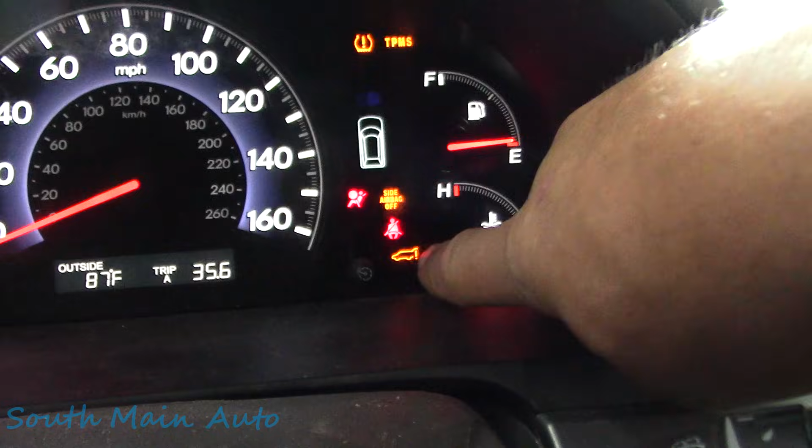Let's see. Oh yeah, it was this symbol down here - a little tailgate up, exclamation point. He left the box of goodies here, so it looks like these are the original parts. That's the control module, and this is the latch here.

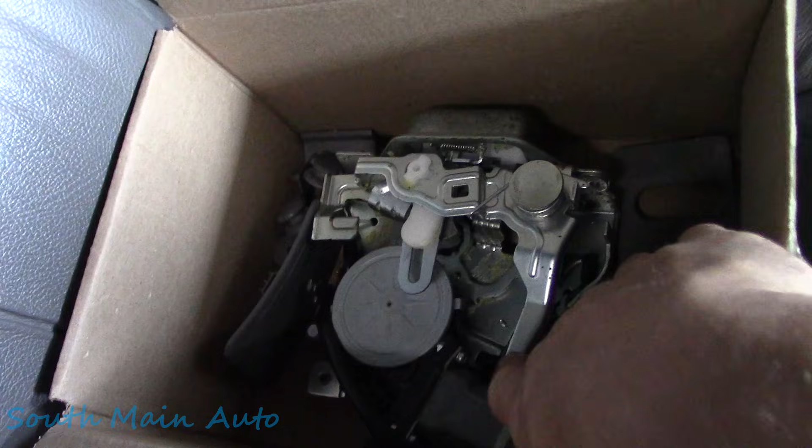So I think first and foremost, I'll go back there - he's got the little panel off it back there. We can take and pop the thing open, just kind of a little visual inspection. Maybe we can even look at this.

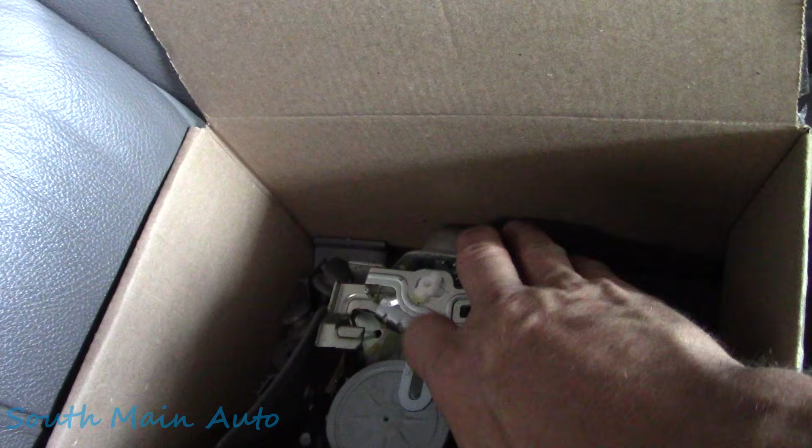And then we're going to have to look at some service data, see how this little guy works. Honda's pretty cool because they do have the little access panel here. I think I've shown this before on a Honda Pilot, perhaps - they had a latch that was bad or something. But you take the little cover off, and there is a little lever in there that you flip, and you can at least get your gate open manually.

But I notice that's all it does when we push the close button. I see that's kind of hanging out of there. The gate's looking a little rough, but still opens and closes mechanically just fine.

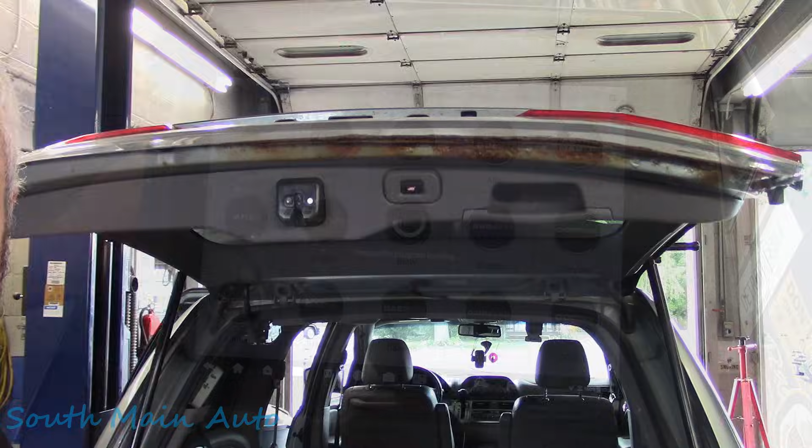I think before we dive too deep into the service data, being that it has its own control module, it appears, we'll look on scan data to see if there's anything here that pertains to the tailgate. Might give us some clues as we're looking at service data.

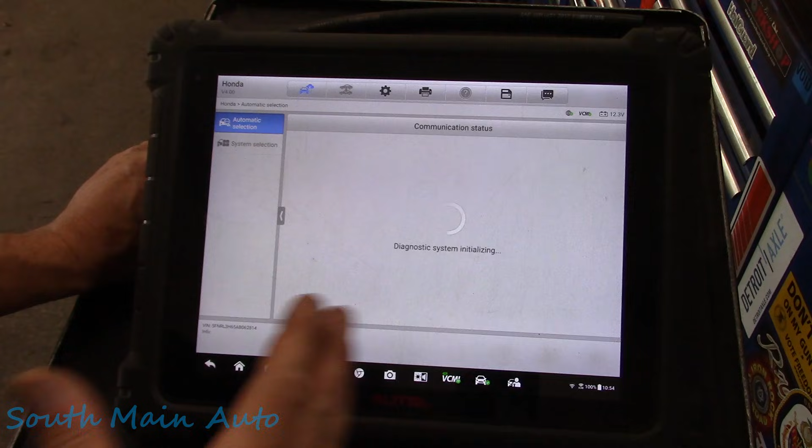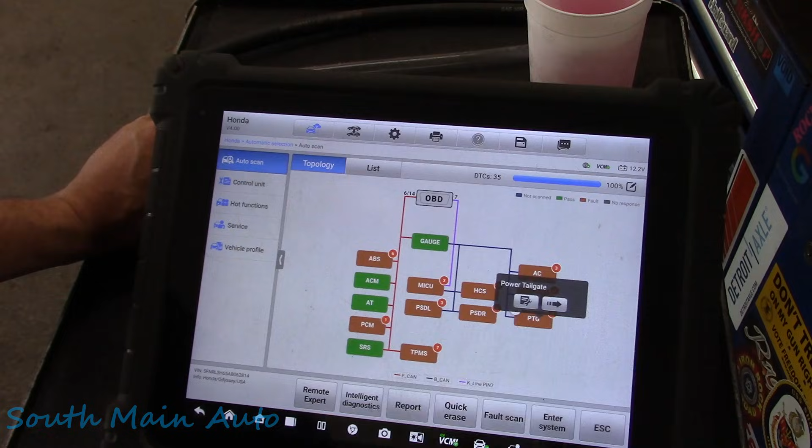So I'm going to let this scan first and see if we can talk to the tailgate module, or whatever Honda refers to it as. Okay, lots of codes. I'm assuming this is power tailgate, and it is power tailgate. So we're going to skip all the other codes for right now and just go to it.

Unless there's like communication type errors, then we'll go through and read everything out. So we'll pull the codes here: tailgate closer unit full latch switch circuit malfunction, power tailgate motor clutch circuit malfunction, and a short in rear mode control motor circuit.

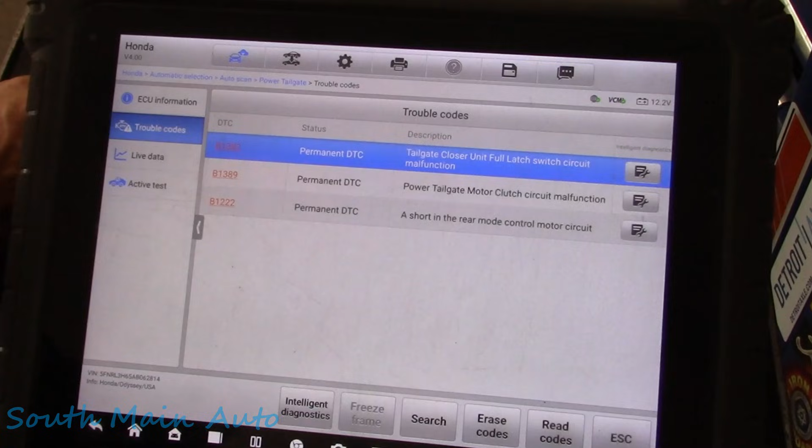So it's interesting, we have 3 permanent codes. And now I know he's been back here fiddling with stuff, so I don't know how many of these are relevant. So we're going to do this.

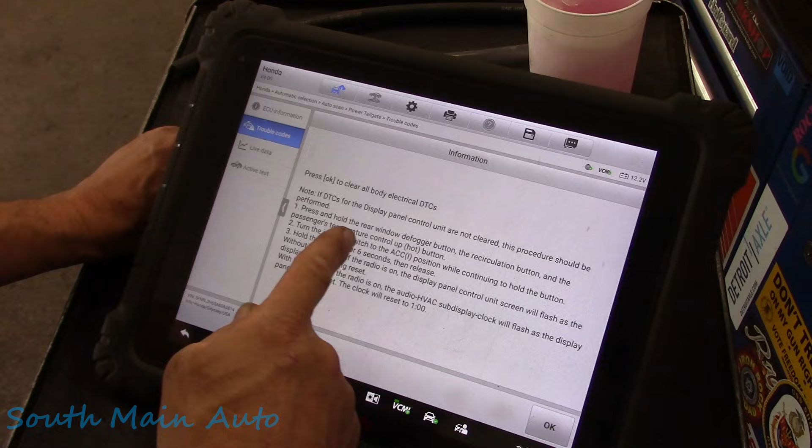It automatically saves them, so I'm just going to press OK to clear body codes. They're not cleared - oh okay, so if it doesn't clear, it tells us how to clear them. So we're going to see if they do clear out and see.

Okay, so it came back with just 2: short in rear mode control motor circuit and power tailgate motor clutch circuit malfunction. So I think this is probably where we'll start.

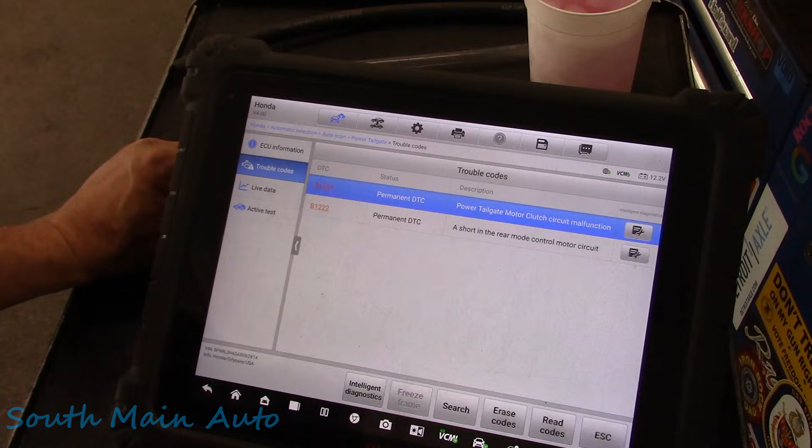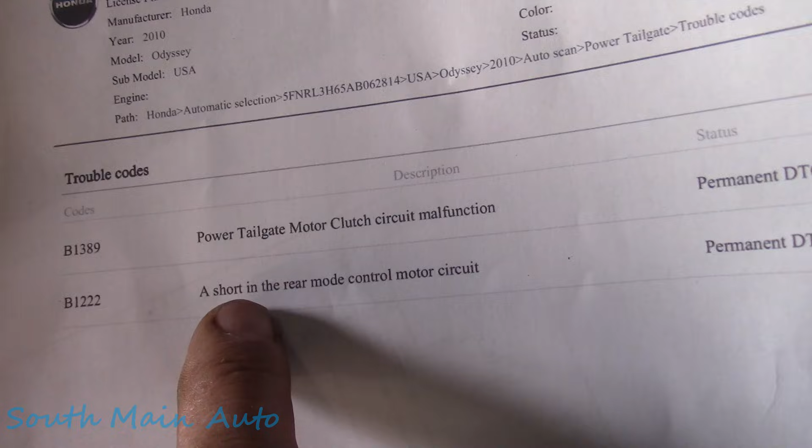We'll look on service data and see what we can learn. So this is kind of interesting - I was just looking on service data, I printed out the code so I didn't keep using the scan tool. This short in rear mode control motor circuit sounds funny because it has to deal with the HVAC unit, the actual rear mode control motor for changing panel to vent to floor. Why it's showing up in the tailgate control module, well, I'll tell maybe, I don't know.

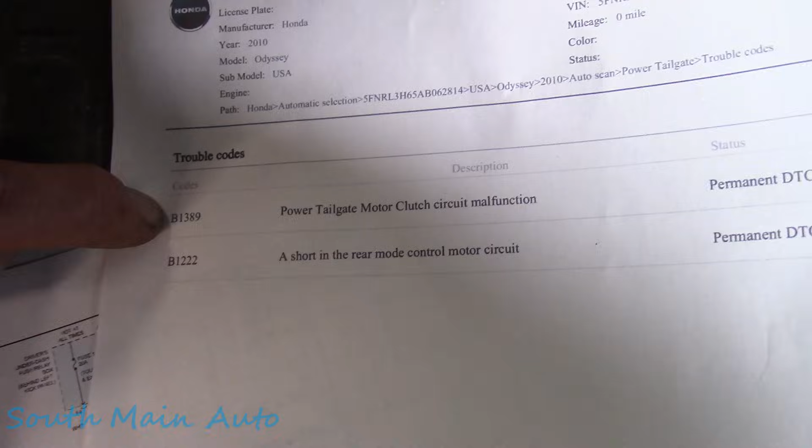This is the one we're actually after, this 1389 power tailgate motor clutch circuit malfunction. So I looked in service data so we could get a connector diagram and kind of see what it says about it, and then I printed us out an actual wiring diagram so we could see it.

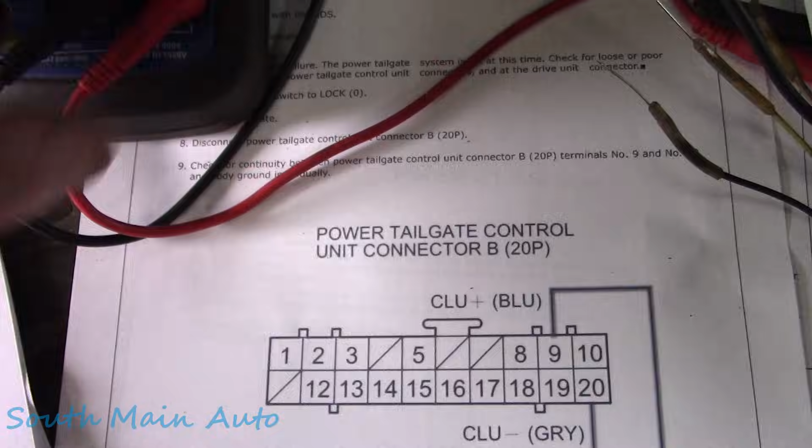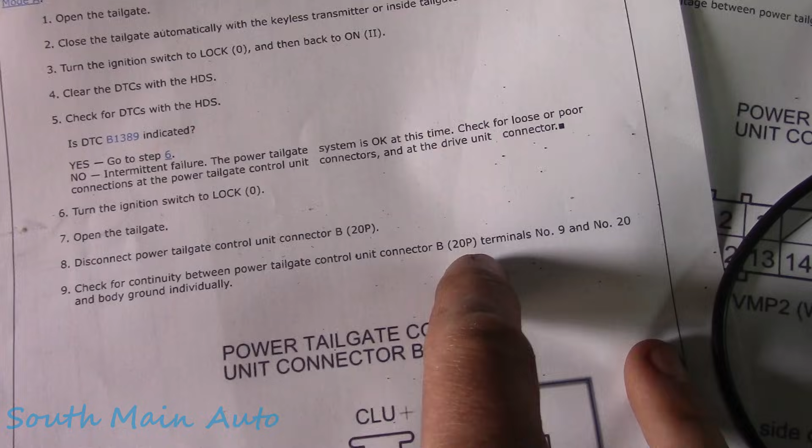So here's this power tailgate clutch, and I highlighted the two wires, and that goes along with service data. They're saying to make sure it's actually a hard fault code, and then check for continuity between tailgate control unit connector B, a 20 pin connector, terminal 9 and number 20, and body ground individually. They want to see if it's shorted.

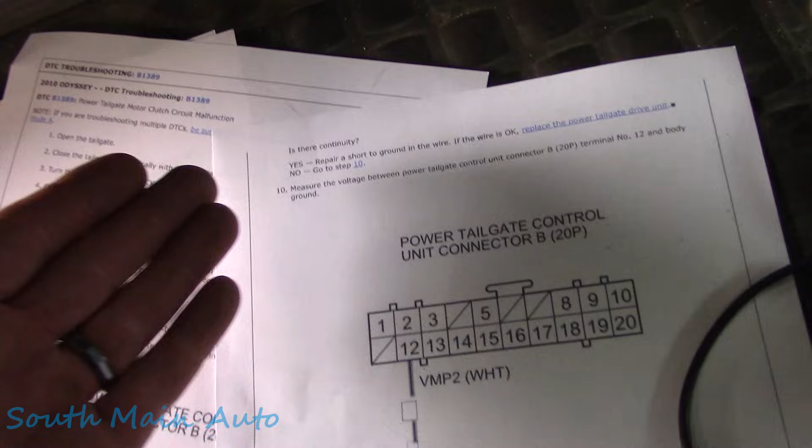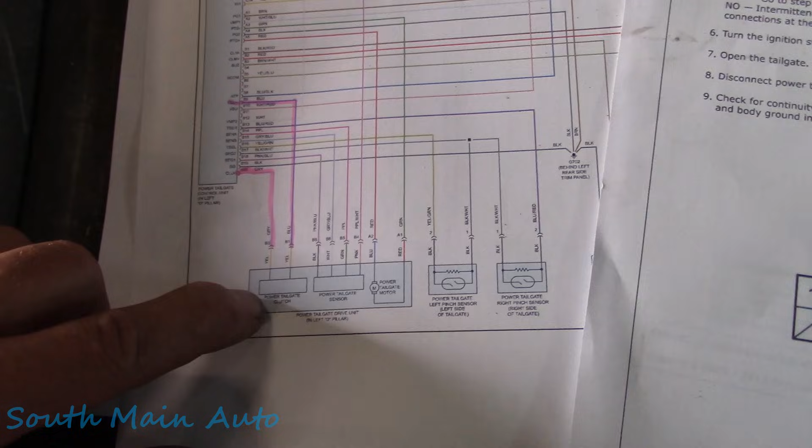Okay, so go along with that, as in short to ground, and then I think they have you do some other checks to see if it has power at the connector. But what we could do with this tailgate clutch, I assume it's some sort of solenoid, is check for short to ground, or check to see if it's continuous through there, and whether this clutch has, say, 10 ohms or something. They don't give us a spec, but is there continuity through the clutch? Does it have the ability to function?

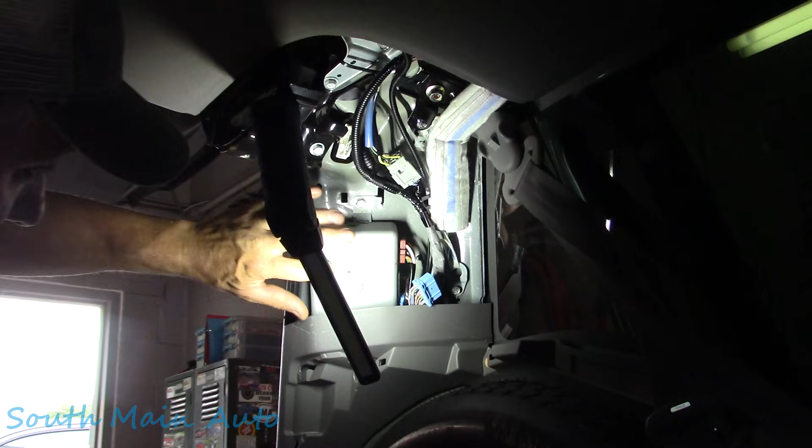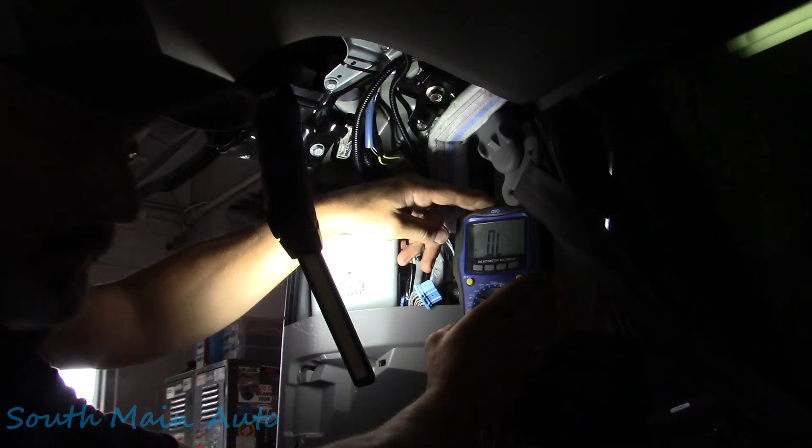Fortunately for us, this fella has this van torn apart. So here's the control module, here's connector B, and I see the gray wire and the blue wire, so pin 9 and pin 20, which go to the clutch. We'll get our meter up here. I don't know if you guys will be able to see it, but I'll give you a shout out as to what it is. I think the pins are big enough that we won't need anything special, so I'll hold that there. We'll just see if it has a short to ground.

Kind of doubt that it does, but nothing on that one, which is good. And then pin 20, or 9, lightly touch it there. Nothing there, but I want to see, more importantly, does it have continuity through it? And it does, about 7 ohms, 6.9.

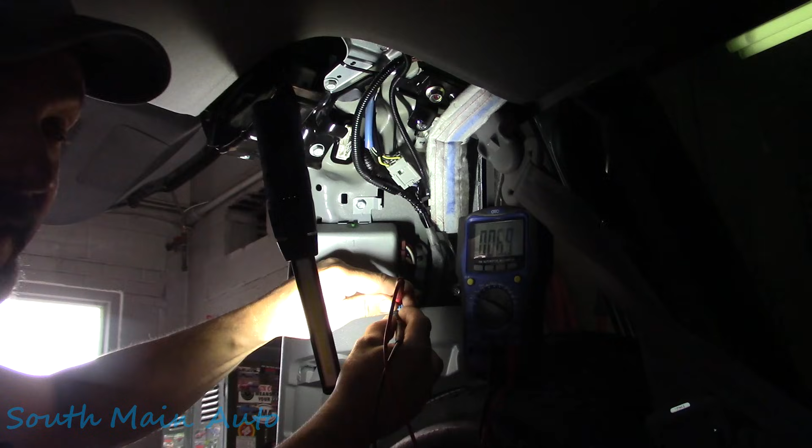Go figure, and that's kind of what I would expect on a solenoid, so that would draw an amp and a half, two amps, if that's how it functions. That's interesting. And I guess while we're right here at this connector, I think this said something about...

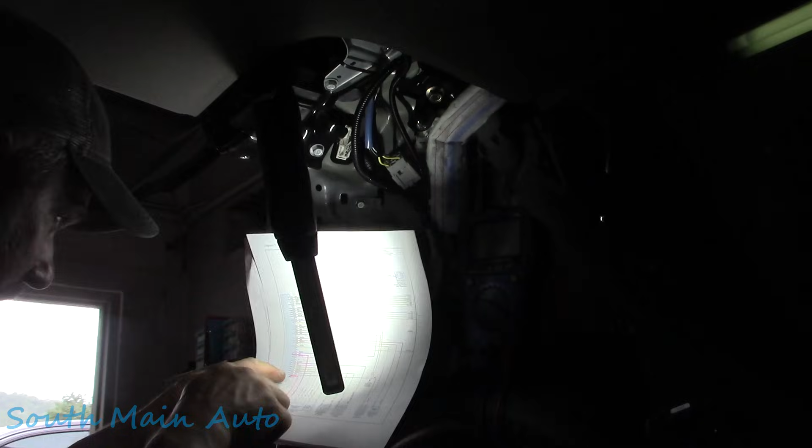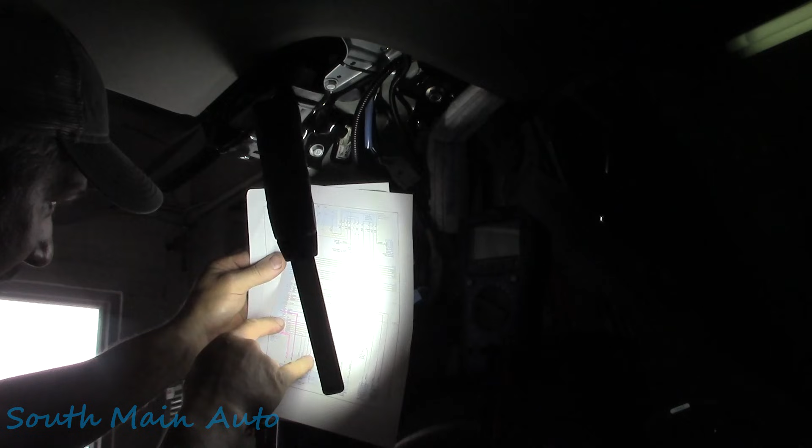Okay, so right from fuse 17, 20 amp, hot at all times, that comes down and goes to pin 12, and it's white. Let's see, pin 12 is supposed to be in a corner, according to this diagram, next to a blank. And there's one right there, so there's a white wire, pin 12.

Let me just see if there's a ground on this connector too that we can utilize. And there is, pin 8—no, sorry, yes, pin 18 is a ground. Okay, so pin 18, which is black, that's the third one in on one of the ends.

Am I missing it here? Second, maybe I'm wrong. Let me double check this, folks. Here, B18, supposed to be next to a gray.

That's interesting. I do see the wire, but it doesn't appear to be in the correct pin. I doubt anybody's been back here moving this stuff. Sometimes aftermarket diagrams aren't great.

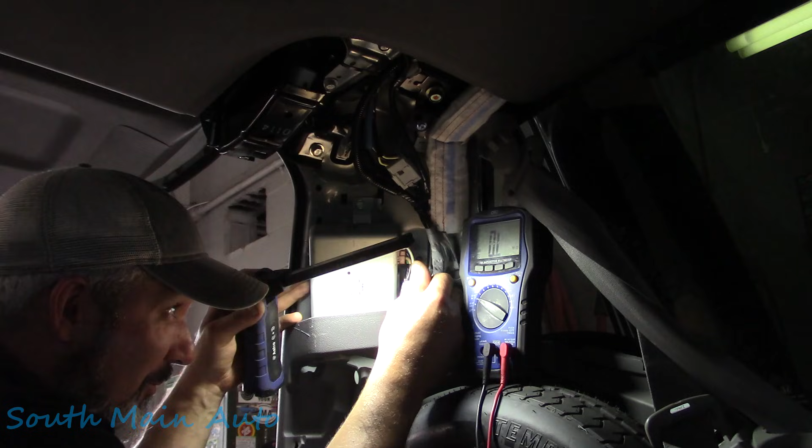Well, I tell you what, instead of trying to use that ground just in case our diagram's wrong, I brought a test light here. We're going to back probe into the one that we know is power, or supposed to be power, and then we'll just check it on the ground here.

Okay, so the test light doesn't light, which tells me we have no power here at our module. So we probably ought to run up there and check the fuse just to be safe. Oh no, I'm sorry, the ground is pin number 19, so that is correct, not 18. So this is the ground. Okay, so I guess we can just stick this right in here.

So we're going to stick one end of our test light in the ground, back probe it, and the other end in the one that's supposed to have full-time battery power, and we'll just leave that there. Now we can run up and find where this fuse is.

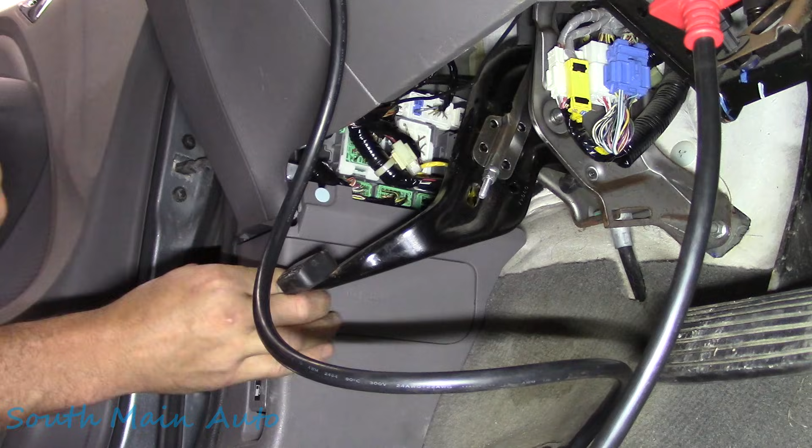It says driver's under dash fuse box, left kick panel, fuse 17, 20 amp. Let's go find that, fuse 17. I'm guessing in here. 17, PTG closer, power tailgate closer. Let's figure out how this thing goes. So we've got some open holes there.

Upper. Sometimes fuse box stuff can be a little confusing. Let's see, so we have a 7.5, a 20, 20, 20, 20, 20, 20, and then a blank, and then a 10, 15, 10. Okay, so this is the way it goes. You hold it like this, read it like that. I don't know what you guys can see down there, but let's get us a good ground here. We'll go right on the bracket for the parking brake. That should be a good ground.

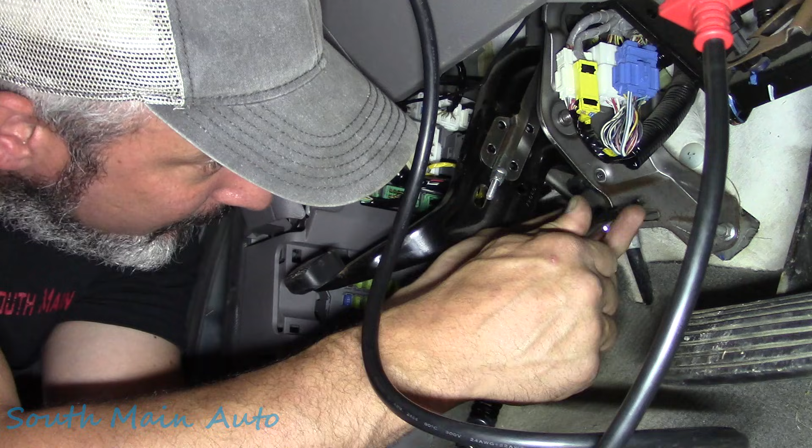So it would be a shame if you drove it this far with a bad fuse or missing fuse. And we were doing number 17. So it starts out at number 12. So 12, 13, 14, 15, 16, 17.

All right, we have power on both sides. So that's good. And that was right next to a 15-10. Okay, yeah, so I just want to make sure we're on the right fuse.

What we should do is pull that out to make sure the fuse has both legs on it. And then we're going to need, I'm guessing, because we don't have power back there, we're going to need a diagram, that perhaps there's a connector between here and there. And that one doesn't go through the flex joint on the door.

The other thing we can do too, proof of concept, before we go chasing any kind of broken wire, we can put power to that thing, which I think that's what we should do. I'm going to get a pair of pliers, make sure somebody didn't play a trick on us and cut the leg off the fuse. And then we're going to run power to that module.

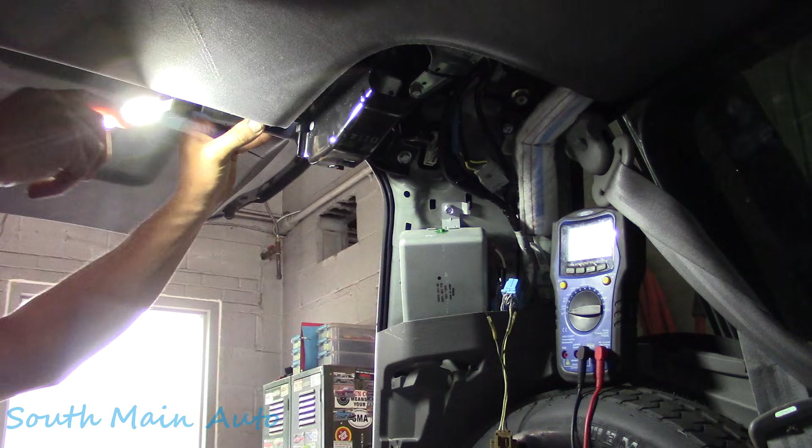Okay, nobody did any kind of funny business as far as chopping that fuse off. I don't think we'll need that. I did hook up our power probe. We can make sure that our ground here is good. So I'm still hooked into the same ground. We can see we can light up the light, so that tells us our ground back here is good. Definitely missing the power, however.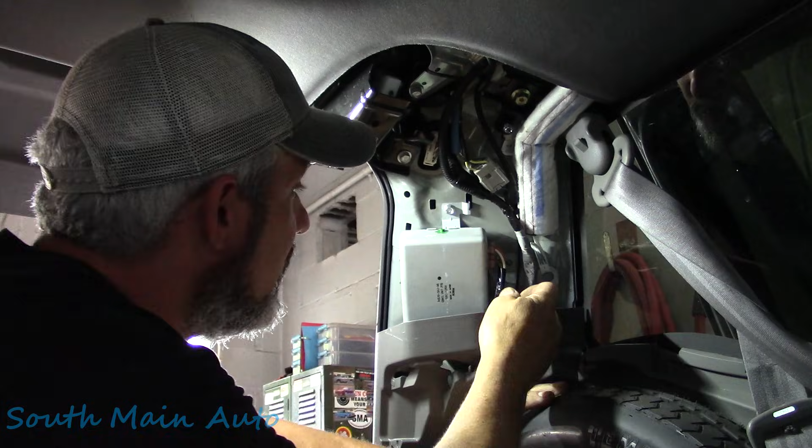Oh, but you see that? We have 9.59 volts. So that must be, well, that tells us something. What's that tell us? That tells us that's not ghost voltage. Boogity boogity, not that kind. But that's going to help us out, I think, in our diagnosis.

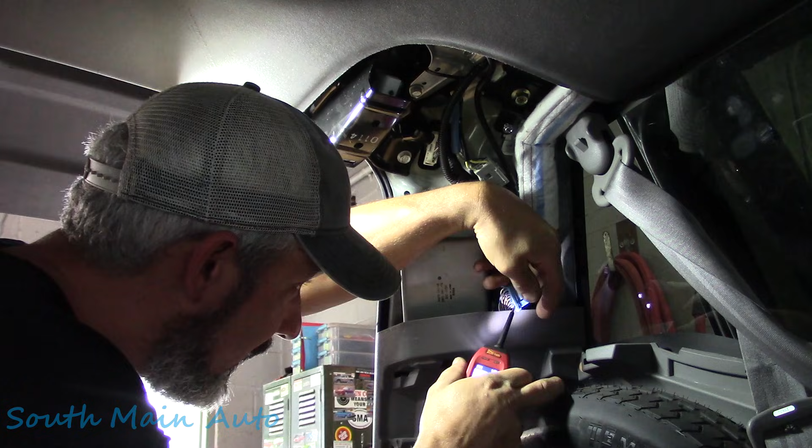Because, let's see, let's just get something random here. Well, I need something random. Can't find anything random. But ghost voltage, you know, I would expect to see it kind of bouncing around, near, at or around 0, just kind of doing silly things. But you can see this here is like 11.16 volts, 11.19, somewhere's in there. But that's not near enough.

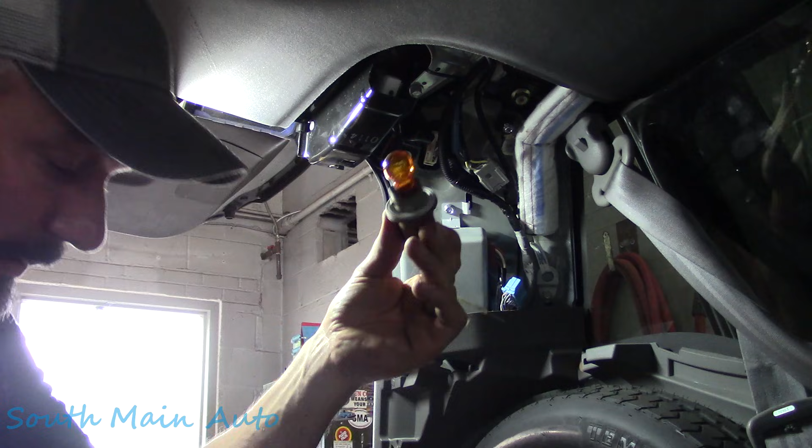It's voltage, but it can't carry current. We proved that with a test light. It's supposed to be a 20 amp circuit. We can't light a 2 amp light or 1.5 amp light. I'll show you a little something here I'm thinking.

So I'm going to back probe this. And this is where a multimeter can get you. Because if we stick our meter on here, because this is not high impedance, I bet if we stick this one on here, I bet we're going to see probably battery voltage or close to it. I'll hold it. I don't know if you guys can see that. Hopefully you can. That's going to be my guess because it's more high impedance.

So there we are, 12.67 volts. So if you're using your meter, 12.8 volts because I've got the battery tender on it. If you're using your meter, you're going to be like, yep, we've got battery voltage where it needs to be. But let me show you a little trick here, folks. There's battery volt, let's see. Let me just stick this somewhere where it stays. Wedge that behind here. So 12.81 volts. I'm going to touch this with my finger. I bet we can pull it down.

Now there's 12 volts, and it's coming down slowly because I got pretty high resistance in my body. 11.3, 11.2, 11.1, 11, 10. I take my hands back off it. We go back up to 13 volts. Let me lick my finger here a little, get a little more conductive. Or take this finger because it's a little shorter and I can reach over here, a little less resistance to those fingers. But you can see I'm pulling it down to 9 volts.

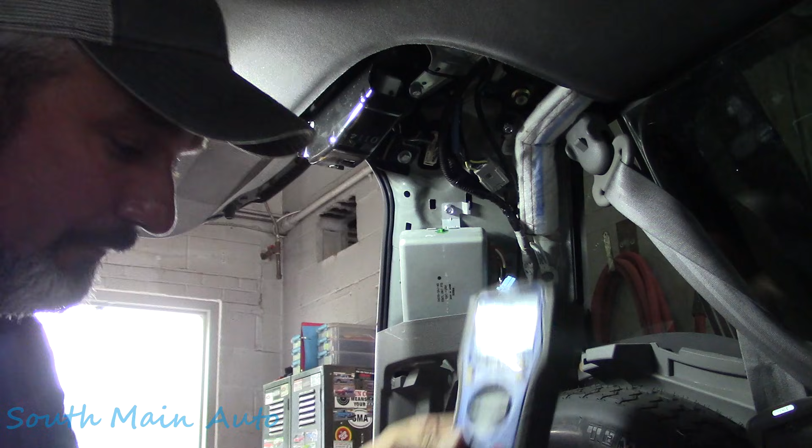So that tells me we have voltage that can't carry current. So don't be tricked by your meter. If you're testing circuits that are designed to carry current, test them with a substituted load that you know is going to work. So there's one lesson for us. It doesn't fix the problem on the car, no, but it gives us a lesson.

So we're going to back probe this. Try to do this without shorting anything out here. We'll take and back probe that because we need to plug this back in to provide power to it. So that's probed back in.

I brought us out a jump wire because I don't know if we're going to have to clear codes or what we're going to have to do to make the tailgate function. I'm going to hook that on there, and then the other end of the jump wire I'm going to hook on my power probe. Whole thing could go up in smoke. I'm going to turn the beeper off. I'm going to provide power to it. I'm just going to hold the power to it, and I've got the scan tool here.

I'm going to take and we're going to clear the trouble codes, erase codes, key on, engine off. Okay, let's just see here. I want to see if the code disappears, and the code is now gone.

Let me go get the very lovely Mrs. O, see if she can... well actually, you know what, I can use the scan tool here.

I'll go to active test, I'll go to drive motor. I don't know if this is going to work. And then I'm going to hit close. Nah, that's not doing anything.

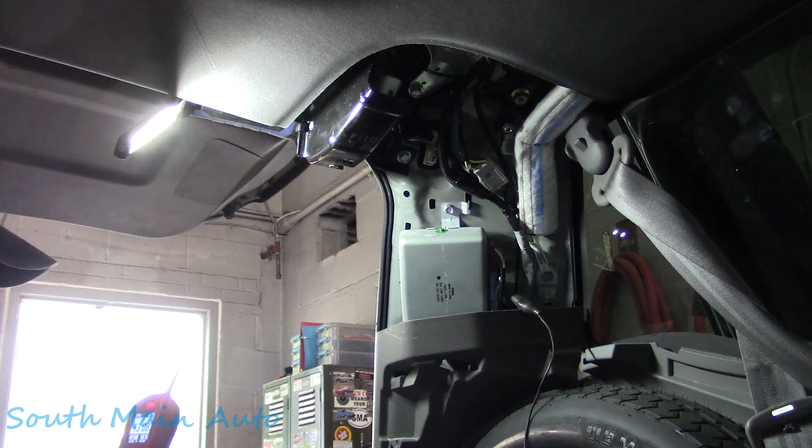Let me go get the very lovely Mrs. O. Or actually, I might have enough wire here. Oops, nope, just lost it. So I don't know if it generates a code here or not, but I'll keep this on here.

I'm going to keep 12 volts fed to it. You stay right there. I'm going to push the button out here, see if it does anything. No, we probably need to reset it manually. Let me get full-time power running this, see if it fixes it. But we might have some other issues too.

I close the door manually. I think we'll come up here. Yeah, I see the lights off. We'll turn the key off. Let's see here. Open and close this door. Turn the key on. We'll make sure everything's unlocked, and then, oh hey, look at that, I heard it.

Ta-da! Okay, proof of concept, it works. It opens, it closes. Okay, so now we know whatever it is we need to know. We know we have missing power at the module, we have it at the fuse. Yeah, and it works back here now.

And then this button back here should work too. How you like my trigger, huh? Vice grips, baby. Alright, that opens, it closes. We gotta open it back up.

So I smell lunch. So I'm gonna go eat lunch. And then, I think they make a latch switch for this Power Probe 4. I don't have one.

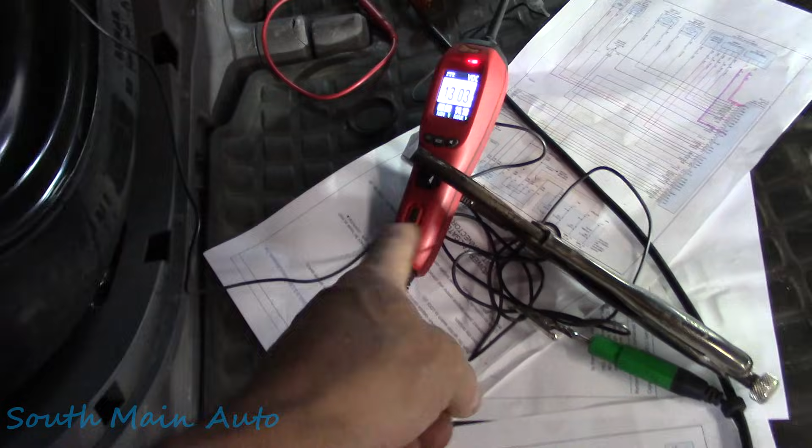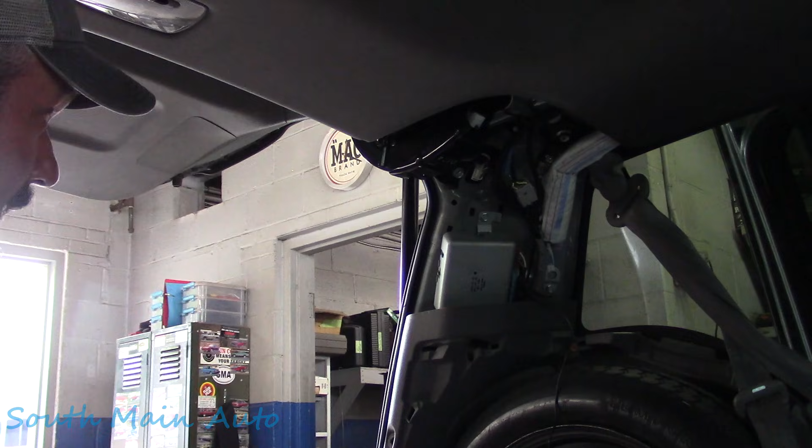We're gonna come up here and shut the key off because we don't need the key on anymore. So there, I think that was pretty easy. At least we know what's going on, and we can call the customer and say, here's what's going on, fella. And we need more time. However, we have diagnosed it.

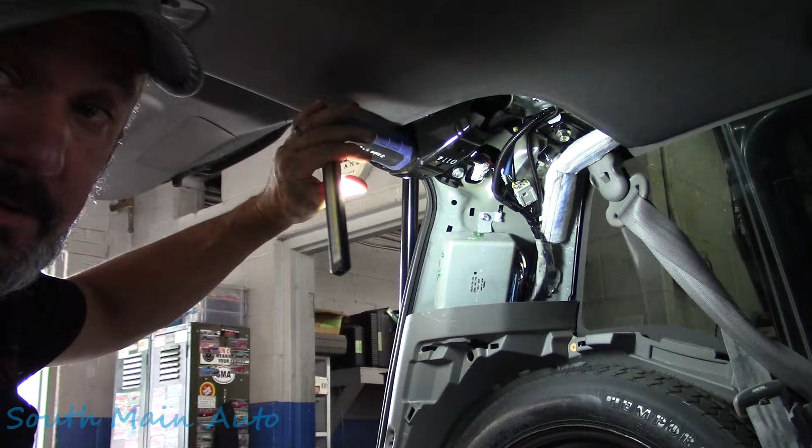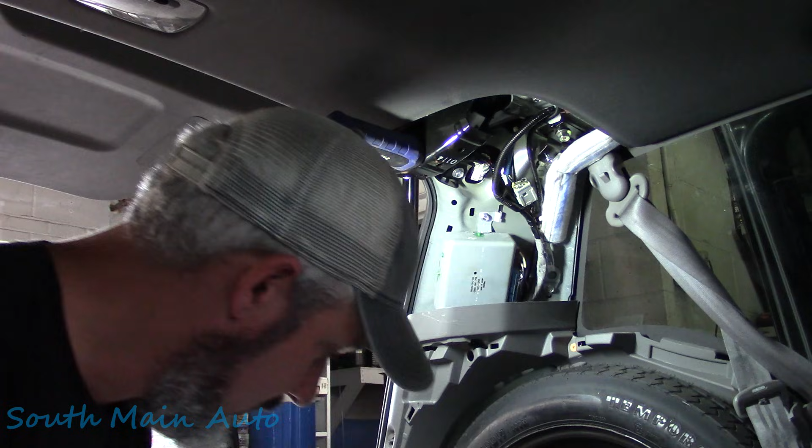I'm gonna take this little sketchy scene apart here before something bad happens. But on this diagram, and it's getting old, things starting to suck, can't see as well as I used to. But the power, it just shows it coming straight down and straight in. But this is a color diagram. And these are good for doing quick little troubleshooting things, but we're gonna need a real diagram from Honda.

I doubt that wire runs from that fuse box straight back to here and that's it, no connectors, no nothing. I'm assuming that there's a connector. My experience with Honda tells me that there's probably a lot of connectors, or at least one would be helpful, because we need to break the system down now, where's the wire broke? Which in this case the wire is not broke.

We know we're dealing with corrosion because we have a voltage here, 12.66 volts. If it was ghost voltage, we wouldn't see that, because it's somewhat connected. We know that for a fact because when we touch our finger on it and touch it to ground, it doesn't pull straight to 0, it pulls to 8 or 9 volts. It can only flow very, very little current through it. So it's definitely a corroded wire, corroded connector. I'd bet the farm on it, only because we have facts to follow.

So I'm gonna eat some lunch with the lovely Mrs. O. What's up? Lunch is ready. Ah, I knew it, knew you were coming. I was just telling people. So we'll go eat lunch with her, and then carry on, find out where the green crusties are living today.

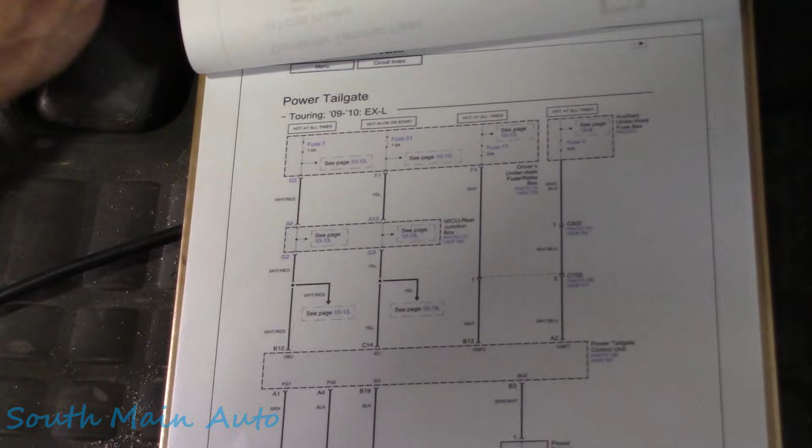Lunch is over, and I printed this out, some stuff, a factory wiring diagram. You can see we were after fuse 17, which is a 20 amp, which it shows on the factory diagram. But what it didn't show on our color diagram is this important little fact right here.

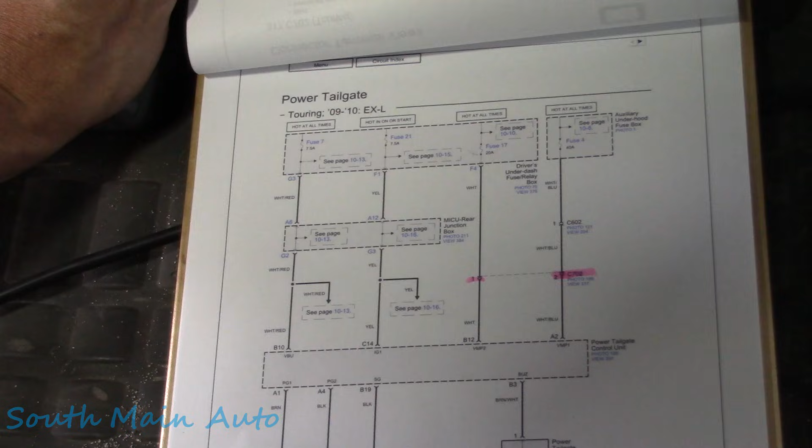See how this indicates there's a connector, pin 1 and pin 2 of connector C, like Charlie, 702. So I said, where is C702? So I printed out the connector pin view, because we're supposed to be pin 1 and pin 2, which doesn't quite make sense because that could be wrong.

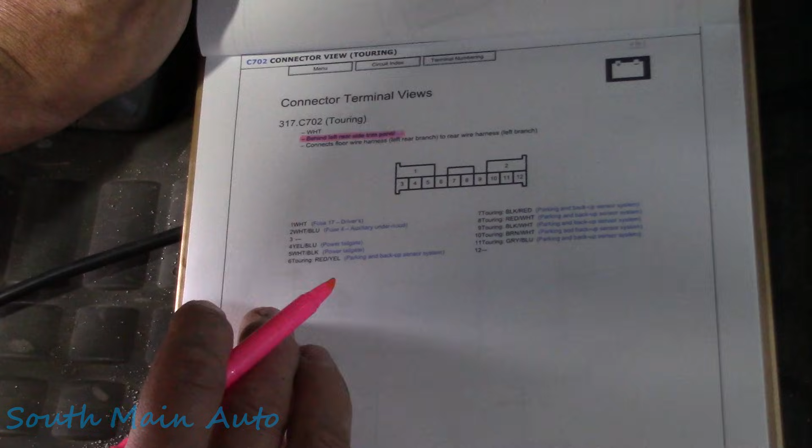Here's C702, and it says behind left rear side trim panel, connects floor wire harness left rear branch to rear wire harness left branch. The pin numbers may be wrong, but we can see that we have wires here pertaining to power tailgate, pin 4 and pin 5.

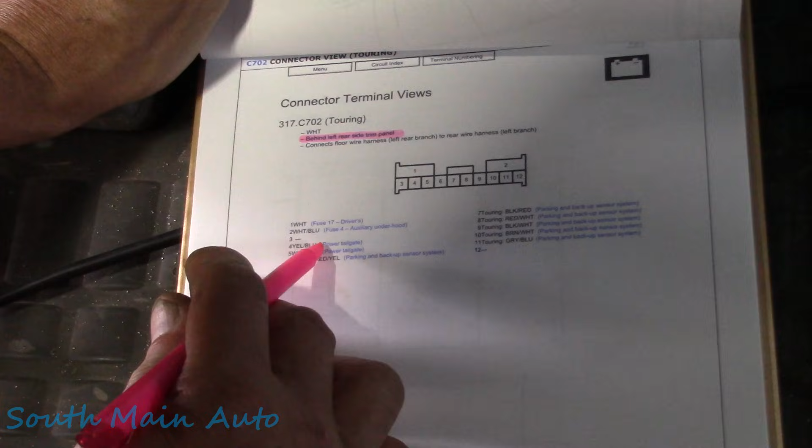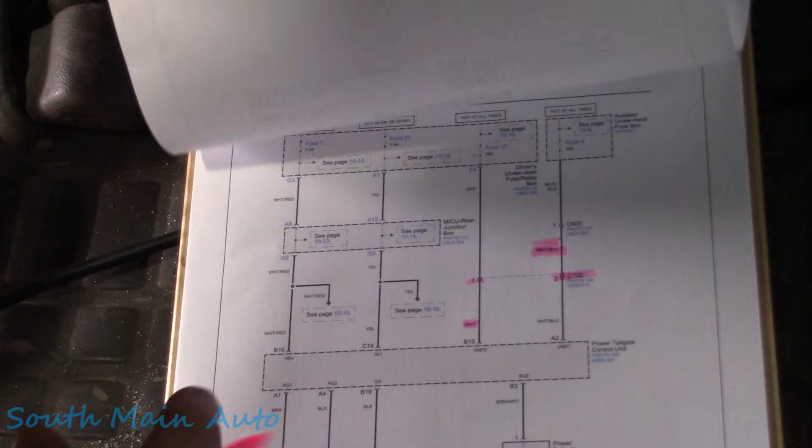See, those are yellow, blue, white, black. Let's see what color they are here. Let's just make sure we're going in the right direction. This one is white, blue, and white. So the wire we're after is the white one. We don't want white, blue, we don't care about that. We want the white wire, which shows it in cavity 1.

Yes, okay, I was thinking of testing that clutch, is what I was thinking of. So yeah, this is what we're after, is pin 1, the white wire, fuse 17 driver side. I'm losing my train of thought here.

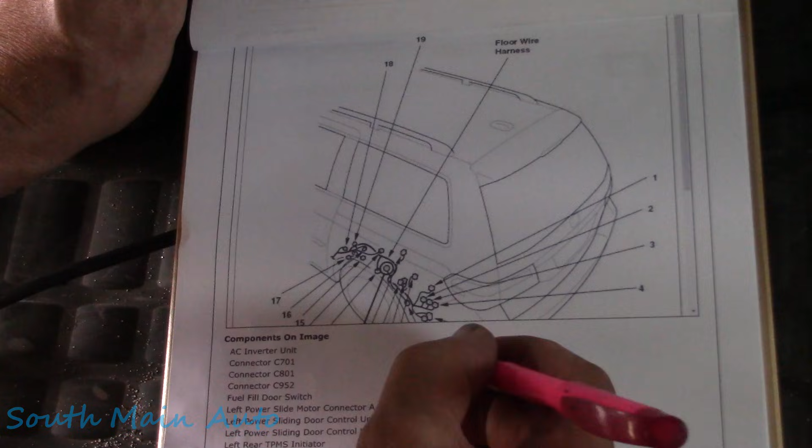And then here's what we needed to find, is where is connector C702. It's on here somewhere. It looks like it's going to be up in this wheel arch, and I think we should find it right here on this list. So this is number 6, C702, male, number 6.

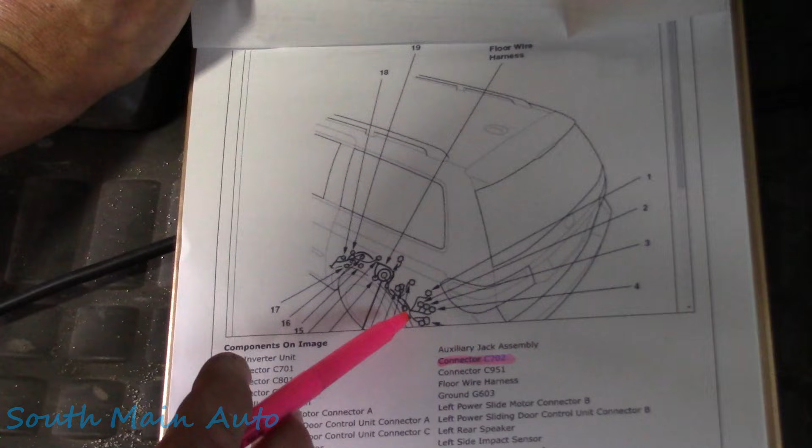It's not on my image, must be I was zoomed in too much. Let me see, so we know which ones it's not. Let me go look on my computer. I didn't even look before I printed this for you. Let's say it's connector number 6. We'll see if it's towards the back, the middle, wherever the heck it is.

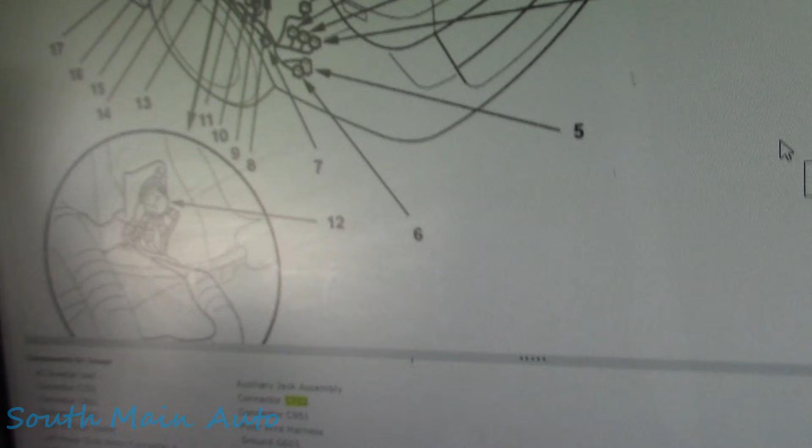Either way, I think all this trim here's got to get torn off and get after it. So there you go, there's number 6. It was missing off my diagram because I did it wrong. But yeah, so it's right here in the very back corner. Maybe we can just pop that trim back a little bit, at least see, are we missing power there. The evidence is pointing towards corrosion, so I'm hoping that perhaps we just have a corroded connector.

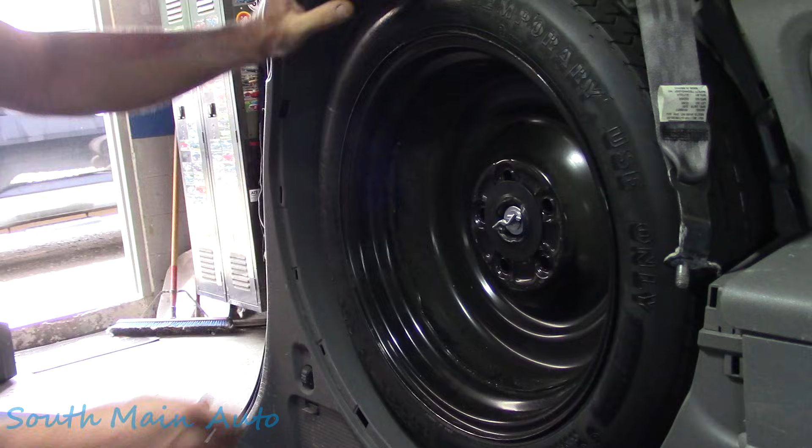Now all this stuff was already off when the fella dropped it off, so that's kind of nice because we don't have to put a lot of things back. We'll put them back kind of how we found them.

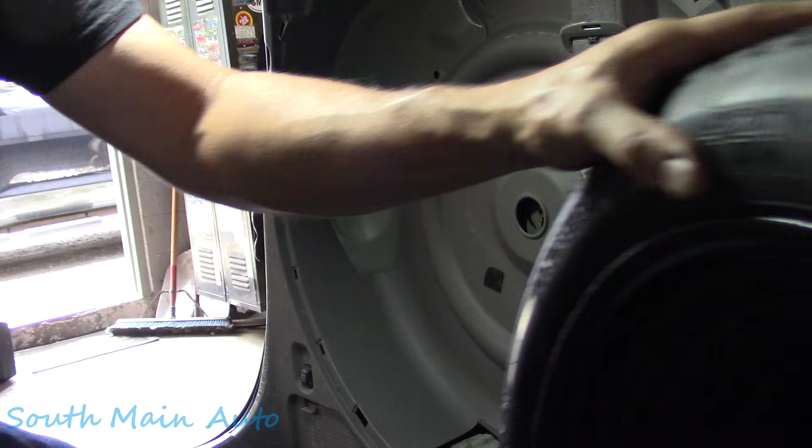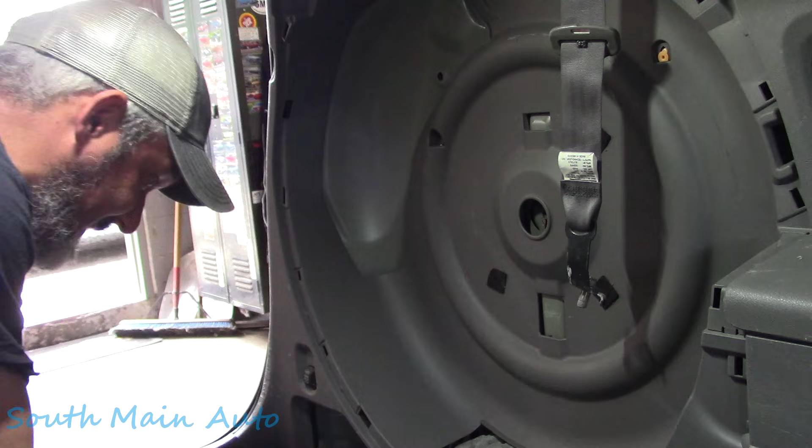Oh, it looks like somebody's been in here, fellas, I see some clips that are kind of funky. Oh, there's a little panel down here for the jack, you got your jack tools down there. I wonder if that's... bing bong, bing bong.

I just wonder if we can see the connector that we need to see, like right here. Some kind of module here. I don't see... I think it was going to be around this area, right?

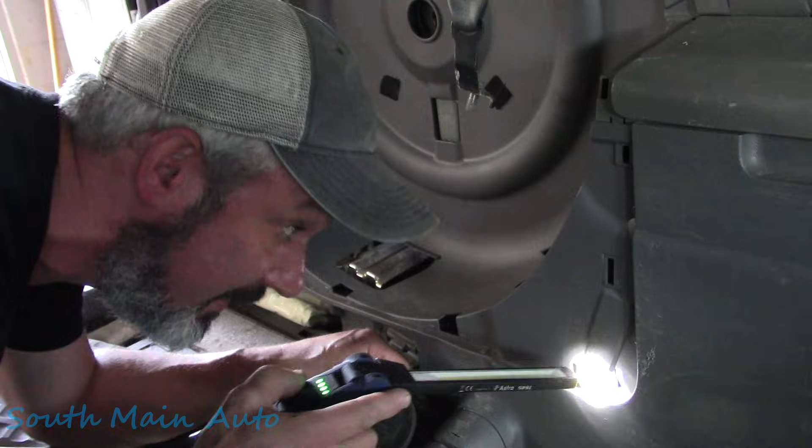I just thought maybe we could see it without. There's a connector here. Remember we did a video with Mrs. O's van? I think her airbag light was on because the connector had gotten some soda or something in it. Let's see about popping this thing back.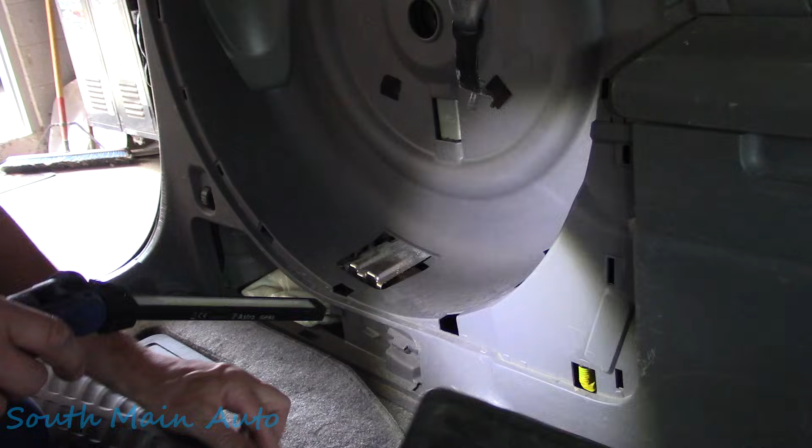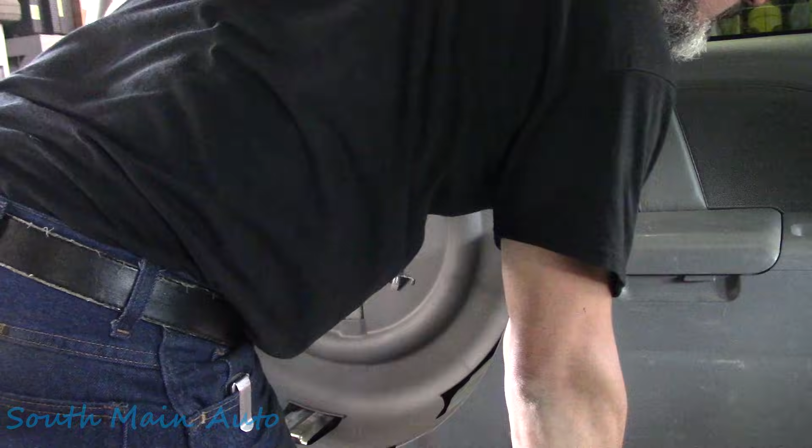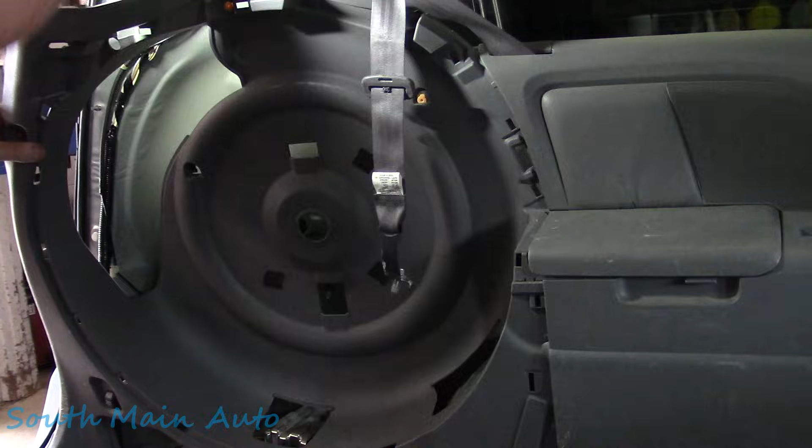Oh, you know what? I bet the wiring. Okay, yeah, it's inside behind this metal panel here. So we will have to take this off because I can see some connectors inside the panels, and it does look pretty corroded and crusty back here.

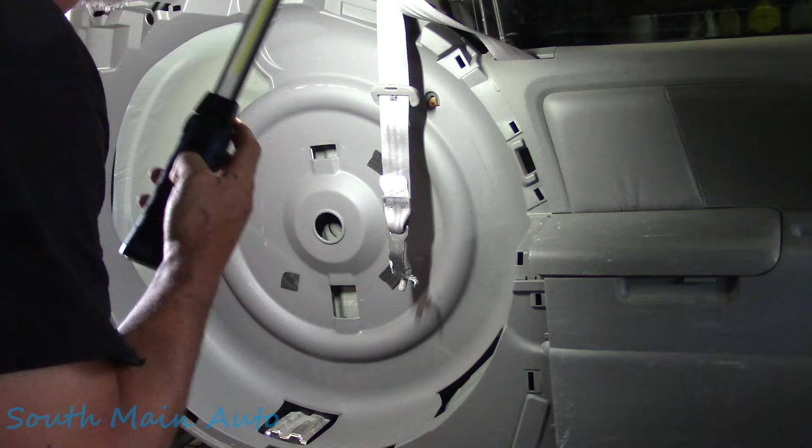Okay, and then there's a little dust shield here, so I'm going to pull the threshold off. We're going to get this panel off so we can hopefully find that connector and at least isolate half the system. Pretty fair amount of rust and corrosion going on back here, folks.

I think, according to our diagram, there's a module that sits right here, and it's one big giant chunk of rust. If I remember right, these Hondas used to have some problems with where the sliding door cable comes through the quarter panel, and they have a tendency to leak a lot of water back here.

So we're going to take this sliding door control unit out here, because I think our connector we need to get to is right there, but I kind of would like to stick this to the side if I could, or at least give us some room to get our hands back in here.

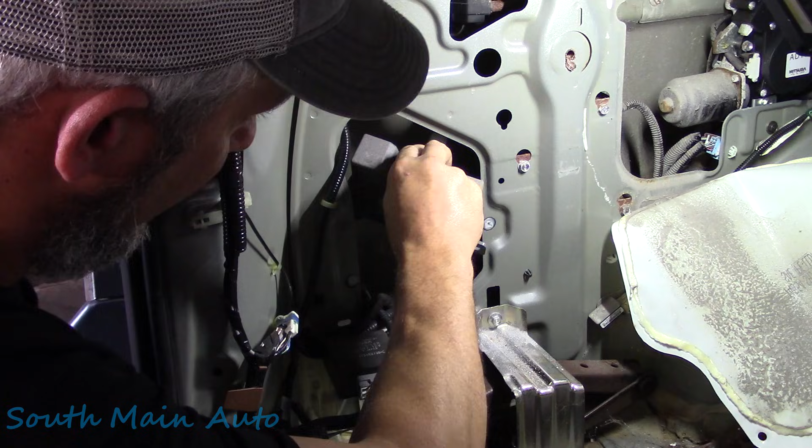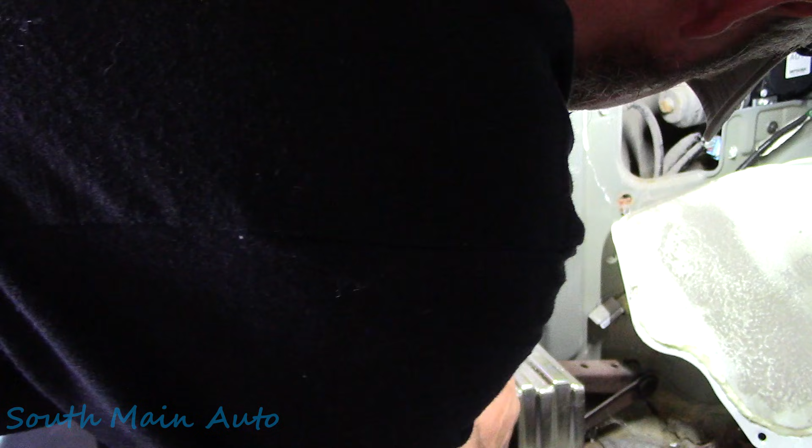Because we at least need some direction, you know, where are we heading with this thing? Is our wire good up to this point? Try to get this thing pushed through here a little bit. There we go, yeah, baby.

Is that our connector? I think it is. I think that's what it looked like.

I just lost the money shot, Mrs. O. Oh, the money shot. I was tipping around trying to find the wire. Found it, so there's our wire. It's all corroded. Dang it! Huh, I usually show the people the money shot. I'm always like, bow, bow, bow.

Yeah, this thing's... can't recreate it either. What's that, babe? And you can't even recreate it either. No, we only do stuff live. We don't do these pre-diagnosed, like blah, blah, blah.

There's a lot going on back here in this corner, folks. A lot of dirt, a lot of rust, a lot of corrosion.

Hi. Alright, did you need Eric? Yeah, anyhow, I just had to help out, guys. Sorry you guys missed the money shot.

Probably should pull the fuse if we're going to do this. Here's the easiest way. You cut it there. Leave these connectors right alone, because if you touch them, you're going to open up a can of worms you ain't never wanted to open.

I'm going to take the green snot here off this one. Which, there it is. There's your money shot for you. Best I could do.

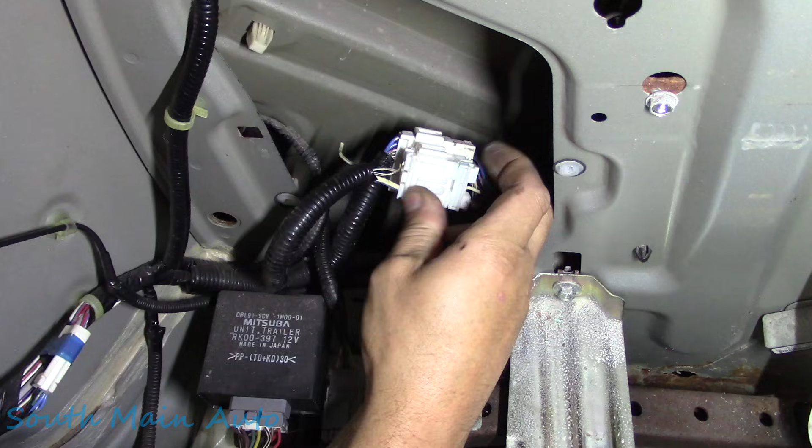Kind of an awkward position because you guys, I need to move you folks into a better position. I don't know if it's better for you, but it's better for me. I think it's better for me. Let's see, now we're actually kind of close. Making it weird again.

So this explains a lot. This explains why we had our voltage that couldn't carry current, right? See how we followed the facts? And the fact of the matter is, we got corroded up wire.

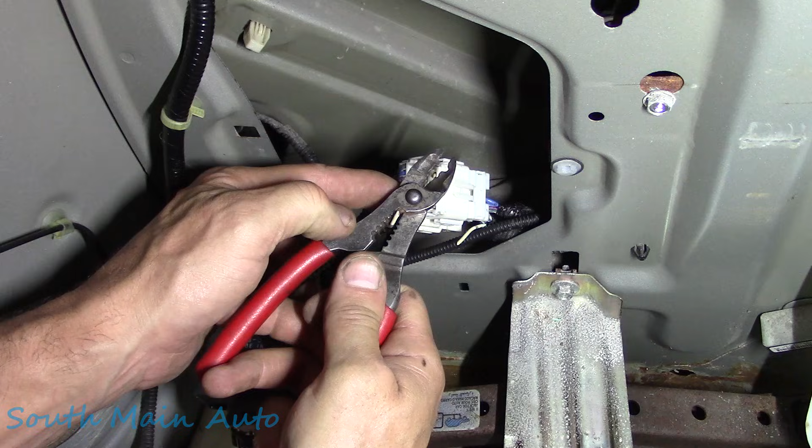And then we're gonna strip her back. We're just gonna add a little section here. We're just gonna bypass the connector. And then that will fix the customer complaint of no power tailgate.

And then we'll let them know what the connector was here, because I think this connector has some other stuff in it, parking aid sensors or something. So strip that back. Let's go get a piece of wire. Almost. You know, we got enough here to just, we don't even need a piece of wire. We can just bypass it and still be in good shape.

We don't want that to touch metal because this circuit's still hot right now. So let's get this thing bypassed. It's kind of a weird spot with you guys in my way.

We're going to use just a crimp and seal connector. I think ultimately the real problem on this vehicle is the water intrusion back here that has happened over years and years. But, you know, what are you gonna do? It's an upstate New York vehicle. Tailgate's pretty rusty, stuff like that.

We'll just bypass it. No sense in fixing wherever the water came from, or accumulated over the years. It's not like it's standing water. The vehicle's not all musty and nasty. It's just, it's too late.

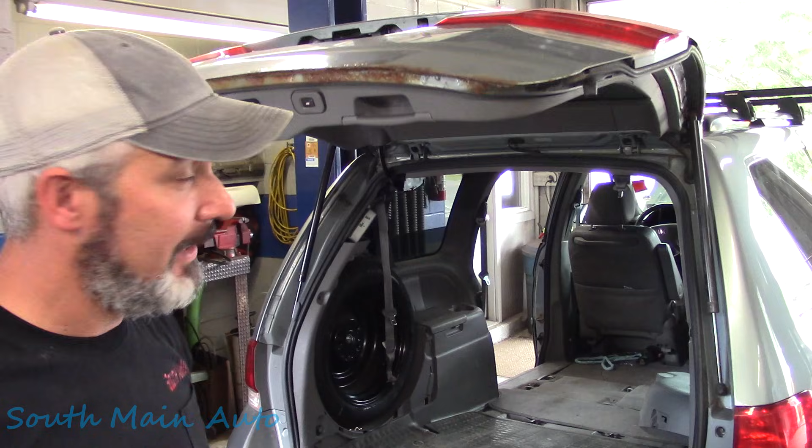Close sesame! I don't even know if that's a thing, but we can see it closes now, so therefore it should open. And I put the plastic jiggly bits, what was on it when it came in, back together and back on it. I let the guy finish the rest. I don't know what else he has unhooked or unplugged or whatever there, but I think the vehicle's happy now.

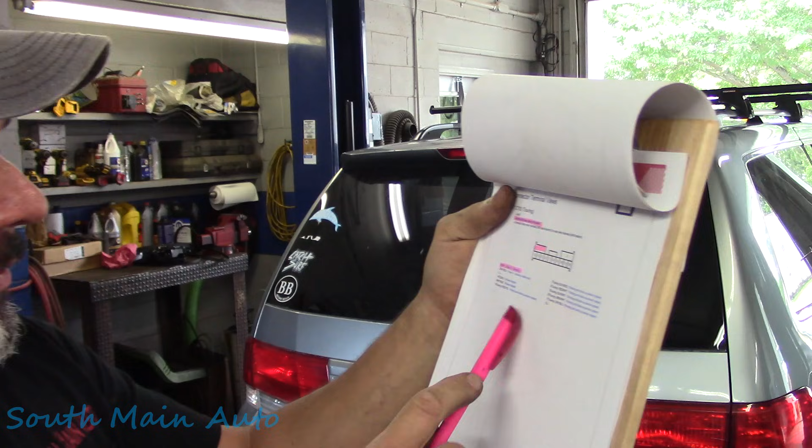We'll have to start it, make sure there's no more lights on. I was looking at the circuit here, and it looks like in the connector, the rest of those wires pertain to the power tailgate. So 3 of them go to the power tailgate, another is full-time power, and then some parking and backup sensor systems for some of the other wires.

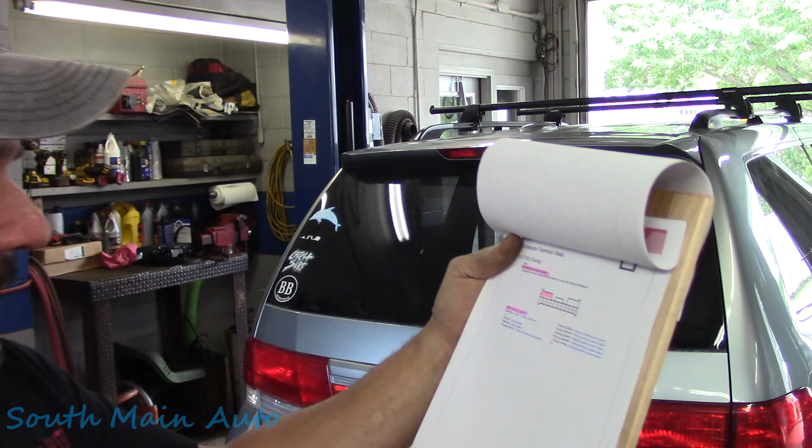So perhaps at some point in another life we'll have some other issues back there, but there's a lot of corrosion and a lot of stuff going on in that rear quarter panel. If I remember correctly, these Hondas used to have issues there.

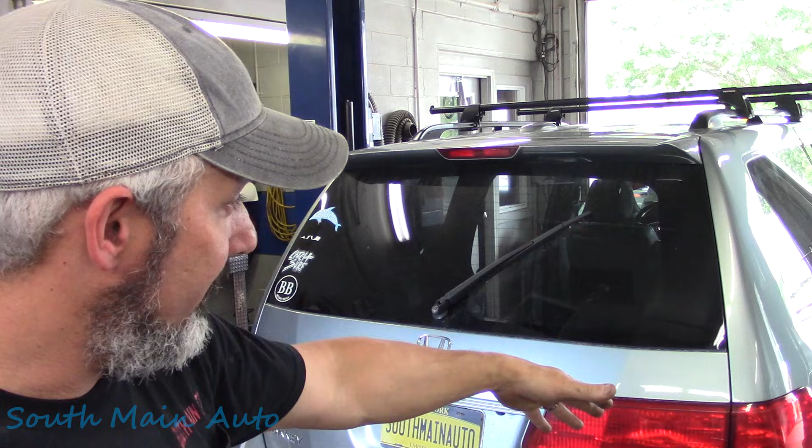I've fixed some of these in the past, or had some come in with water intrusion issues, and it's where that cable comes out of that quarter panel and the drain fills up, then the quarter fills up and the cars get full of water and stuff like that. So I've seen some issues there, not too often, probably not as much as body guys do. But I think we did the right fix for it.

Used some logical deduction to find out what the problem was, and then just kind of got lucky as far as finding it was broke at the connector. But we knew we were dealing with some corrosion. Knowing Hondas, I typically don't have wiring issues as far as chafage and just random breaks. Usually there's problems at connectors, at modules, stuff like that.

I think we did a video similar to this with Mrs. O's van back when she had the Honda with an airbag light on. It was a connector in one of the quarter panels, if I remember right, and it had some kind of sticky substance in it, like soda, because it was below a cup holder. I was like, oh, well, no kidding. We got 3 kids that are animals, and could have got something in there.